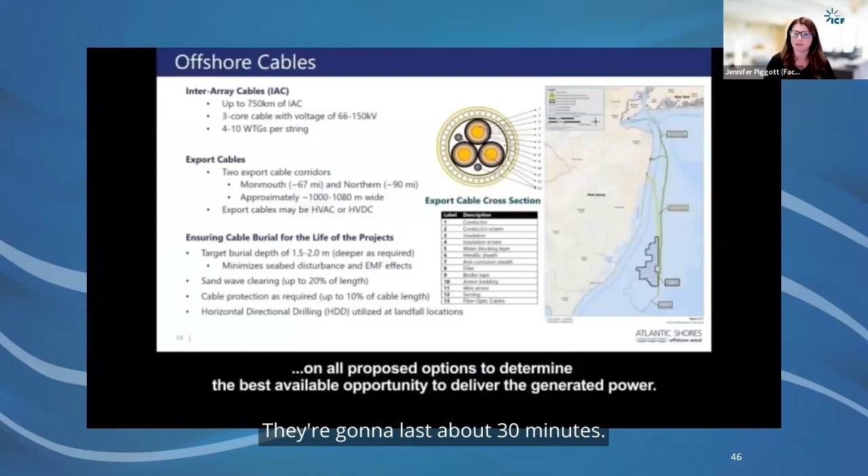Hello, everyone. My name is Stephanie Wilson, and I'm the Permitting and Environmental Manager for Atlantic Shores Offshore Wind. I want to start off by thanking BOEM for providing me this opportunity to introduce Atlantic Shores and the Atlantic Shores North project. I also want to thank those of you who are participating in this scoping meeting today. Your input into this process is vitally important, and we are glad to see you here.

The project proposed of this construction and operations plan is being developed by Atlantic Shores Offshore Wind, LLC, which is a 50-50 joint venture between EDF Renewables and Shell New Energies. This JV brings together two U.S. industry leaders in both renewable and offshore energy development, as well as two companies that have extensive experience in developing and delivering successful offshore wind projects across Europe.

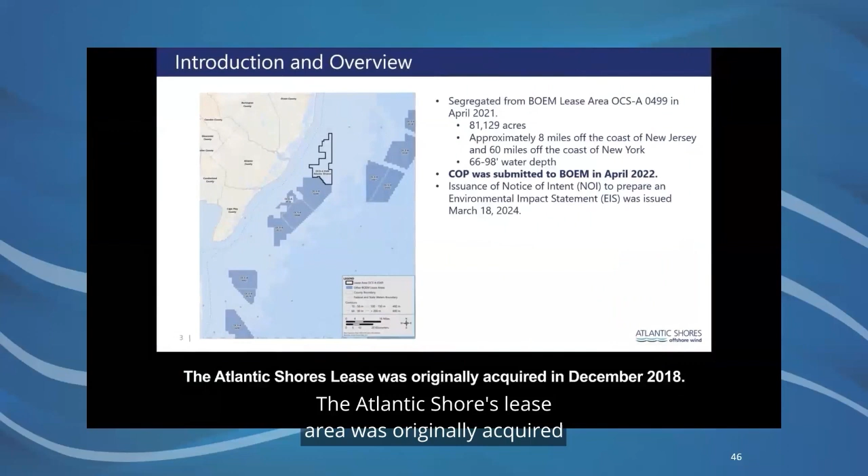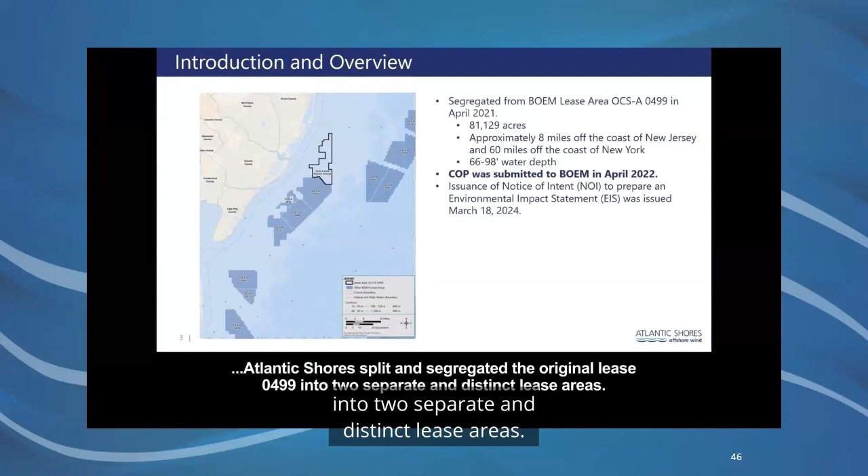The Atlantic Shores lease area was originally acquired in December 2018. In seeking to develop a portfolio of projects, Atlantic Shores split and segregated the original lease 0499 into two separate and distinct lease areas. The Atlantic Shores North lease area is now known as 0549. The development of lease area 0549 is the subject of the project I will be describing to you today. The projects within the Atlantic Shores South lease maintain the original lease number 0499 and are actively under review by BOEM and cooperating agencies in a separate proceeding.

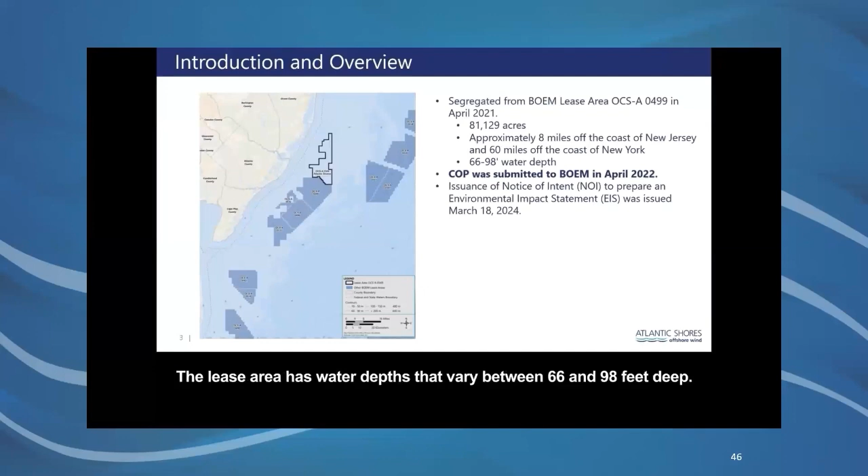The Atlantic Shores North lease is approximately 81,000 acres in size and located approximately 8 miles east of the New Jersey coast and approximately 60 miles south of New York. The lease area has water depths that vary between 66 and 98 feet deep.

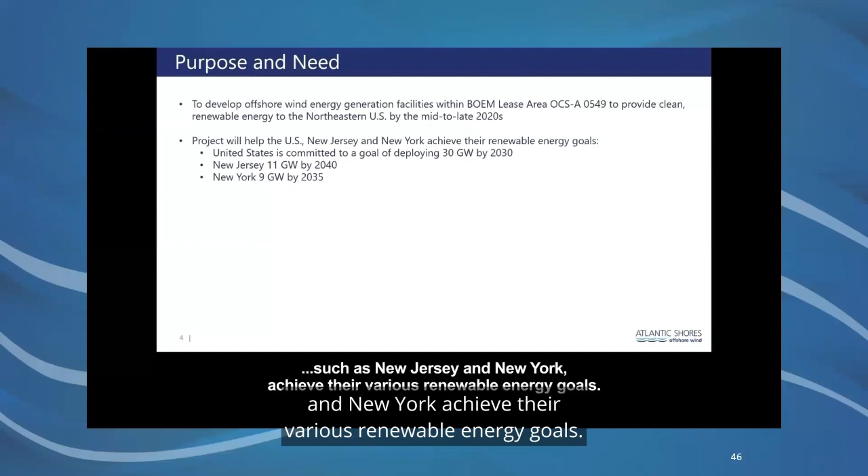The construction and operations plan for Atlantic Shores North proposes to develop an offshore wind energy generation facility to provide clean, renewable energy to the east coast of the United States by the mid to late 2020s. This project will help the United States and mid-Atlantic states such as New Jersey and New York achieve their various renewable energy goals. The United States is committed to a goal of deploying 30 gigawatts by 2030, while New Jersey is committed to 11 gigawatts by 2040, and New York is committed to 9 gigawatts by 2035.

The key benefits of the Atlantic Shores North project is that it will provide a diversification of the state's electricity supplies, an increase in electricity reliability, a reduction in greenhouse gas emissions, significant environmental and public health benefits, and substantial new employment opportunities and community benefits to host communities.

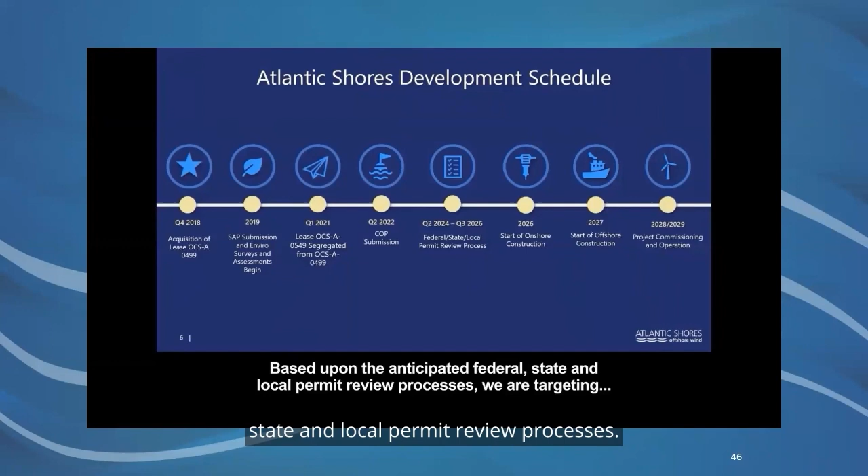As indicated in the slide, Atlantic Shores has been actively developing the lease area since late 2018. Based upon the anticipated federal, state, and local permit review processes, we are targeting start of onshore construction in 2026 and the start of offshore construction in 2027, followed by commissioning and operation of the project in 2029.

The construction and operations plan currently under review is the culmination of an extensive body of work, including over 5 years of stakeholder engagement, a thorough technical calibration of the proposed project design envelope with the market and key suppliers, and a robust environmental assessment that consists of over 35 surveys and studies and 5 seasons of geophysical and geotechnical survey work.

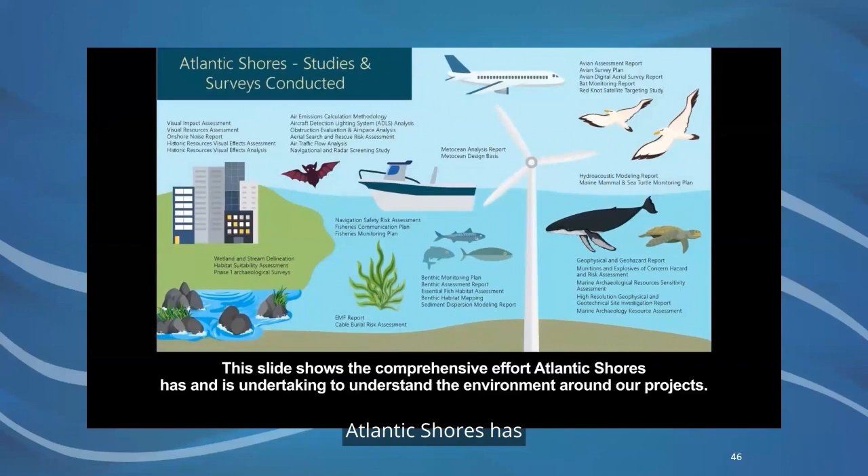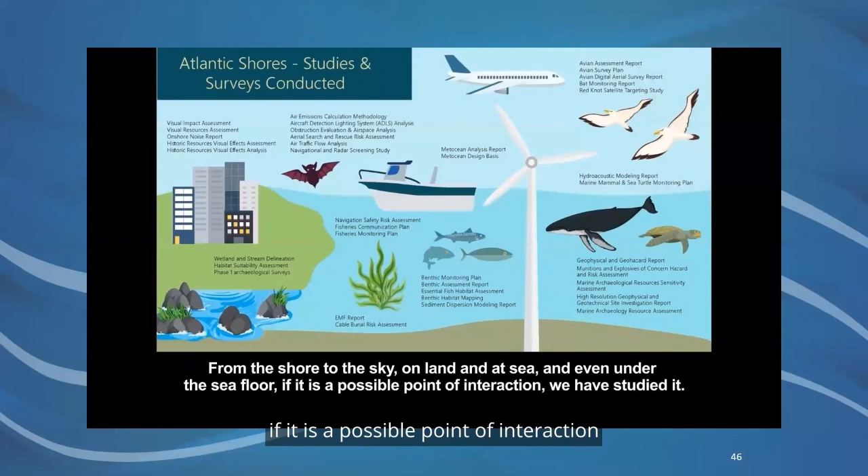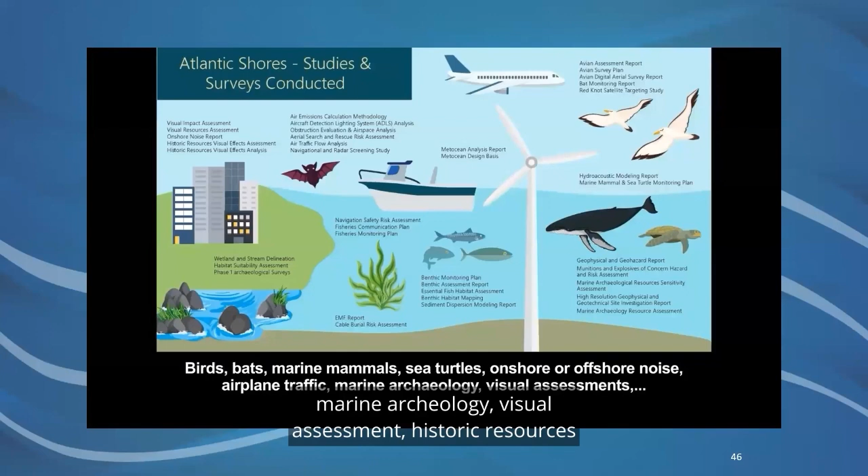This slide shows the comprehensive effort Atlantic Shores has and is undertaking to understand the environment around our projects, from the shore to the sky, on land and at sea, and even under the seafloor. If it is a possible point of interaction, we have studied it. Birds, bats, marine mammals, sea turtles, onshore and offshore noise, airplane traffic, marine archaeology, visual assessment, historic resources, and EMF are just a few of the areas we have studied.

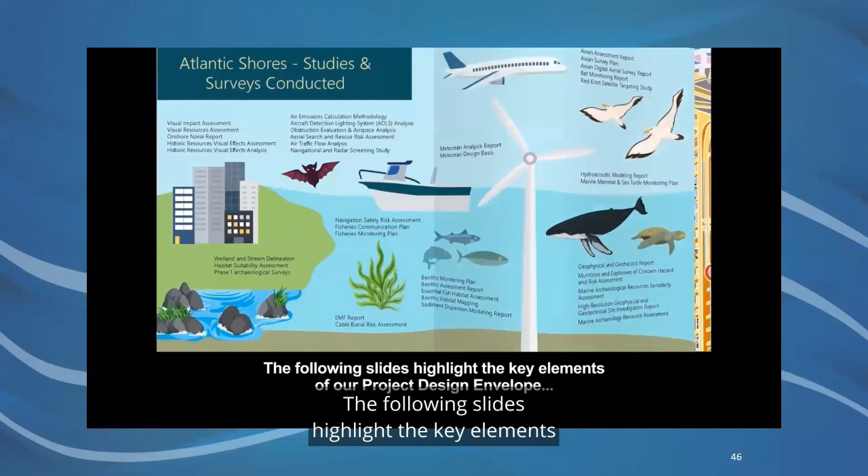The following slides highlight the key elements of our project design envelope that we have developed and included in our construction and operations plan. A project design envelope enables a range of project design components to be evaluated while the industry is evolving and growing. With each year, new technologies are made available to the market. The project design envelope enables Atlantic Shores to capture prior project developments and industry learnings by enabling a range of designs to advance through environmental review and permitting and support the advancement of best available technologies.

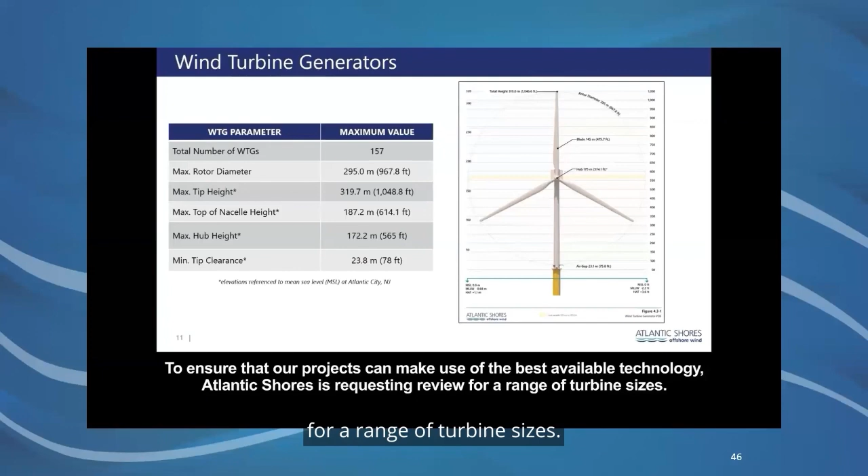We'll start offshore with our wind turbines. To ensure that our projects can make use of the best available technology, Atlantic Shores is requesting review for a range of turbine sizes. The maximum commercially viable wind turbine that has been evaluated in our COP has a tip height of approximately 1,048 feet.

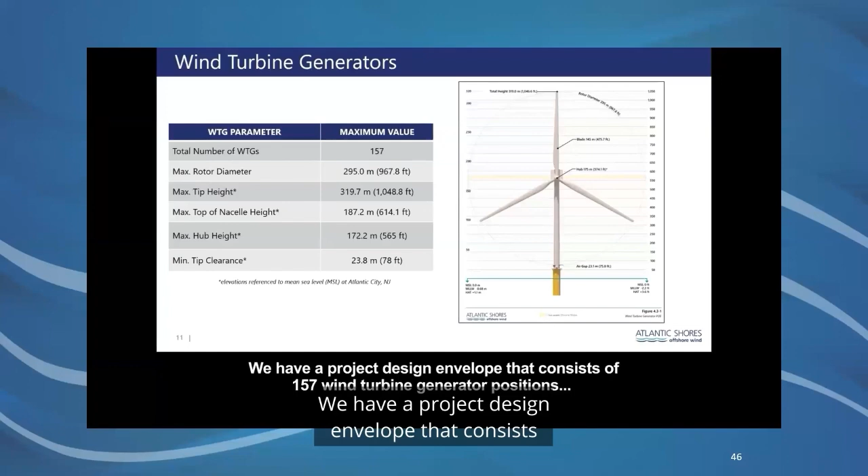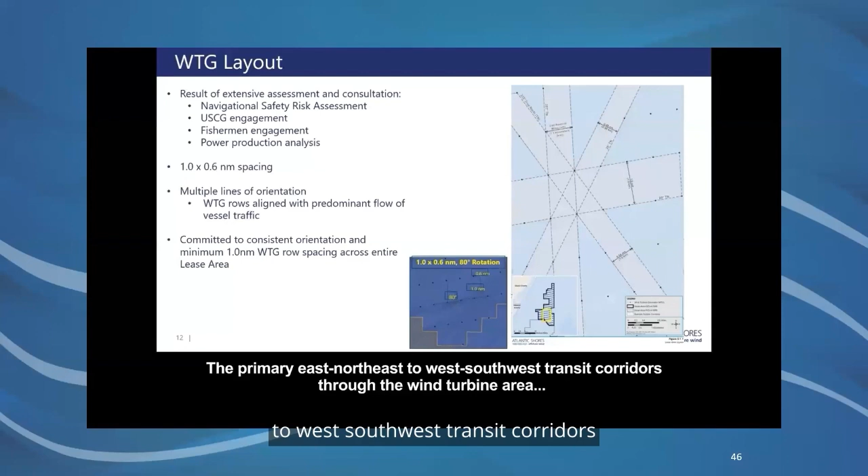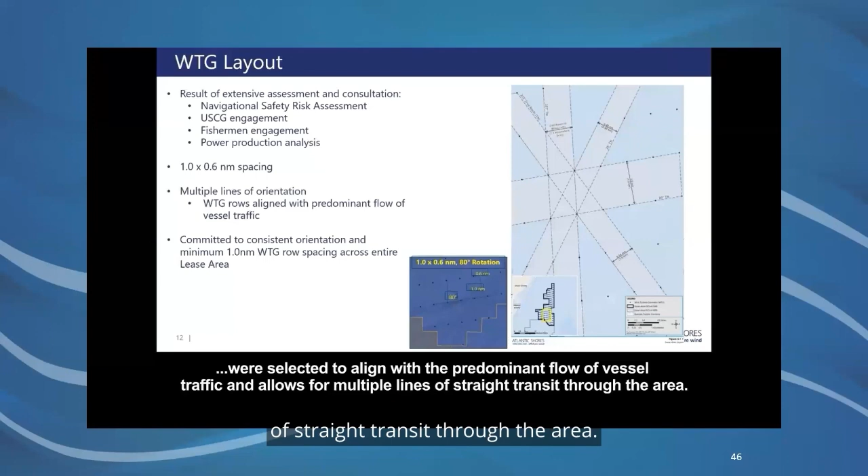We have a project design envelope that consists of 157 wind turbine generator positions, which have been laid out in a uniform grid pattern with turbine rows spaced 1 nautical mile apart within the lease area. The distance between the wind turbines along each of these rows is 0.6 nautical miles. The primary east-northeast to west-southwest transit corridors through the wind turbine area were selected to align with the predominant flow of vessel traffic and allows for multiple lines of straight transit through the area. This layout is consistent with the layout proposed in the Atlantic Shores South project.

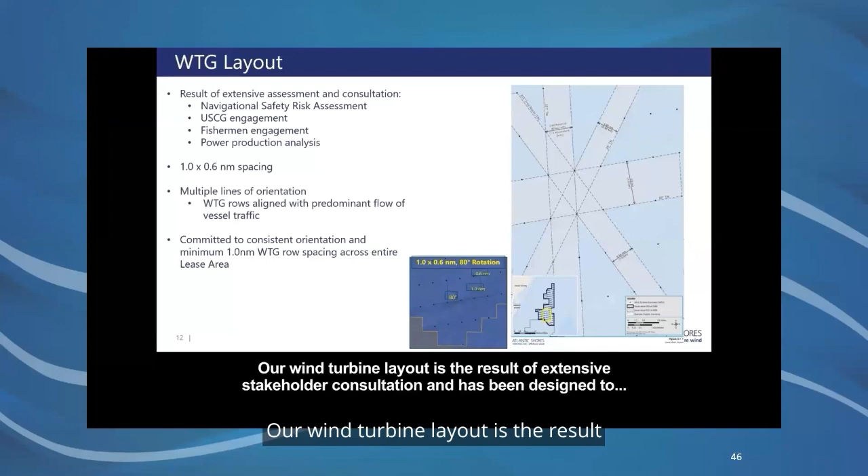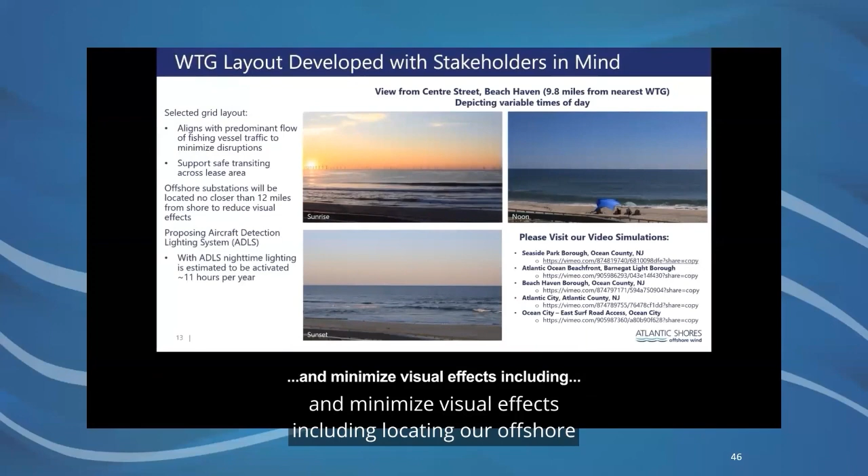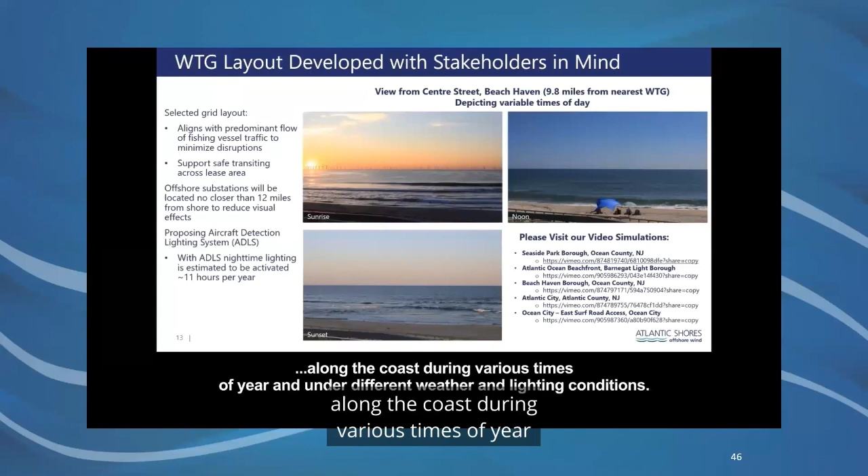Our wind turbine layout is the result of extensive stakeholder consultation and has been designed to support safety, maximize coexistence with existing marine users, and minimize visual effects, including locating our offshore substations no closer than 12 miles from shore, and proposing the use of Aircraft Detection Lighting System, or ADLS, which only activates when an aircraft is in close proximity. We encourage you to visit our visual simulation videos to get a better sense of what our projects might look like from various locations along the coast during various times of year and under different weather and lighting conditions.

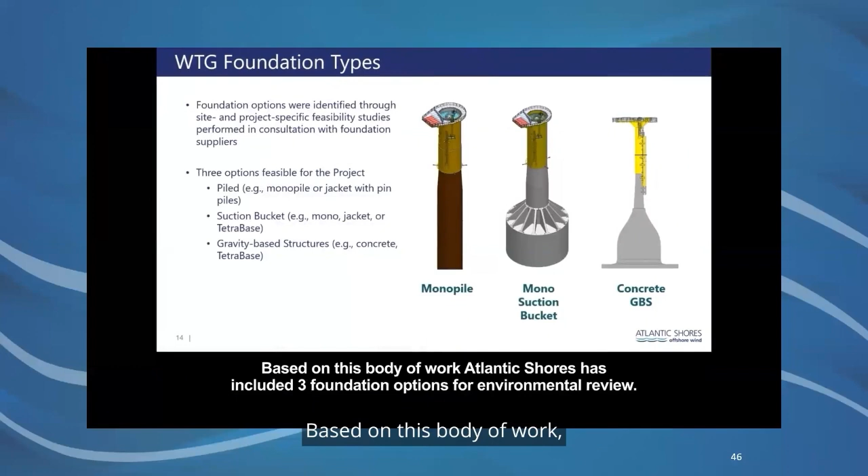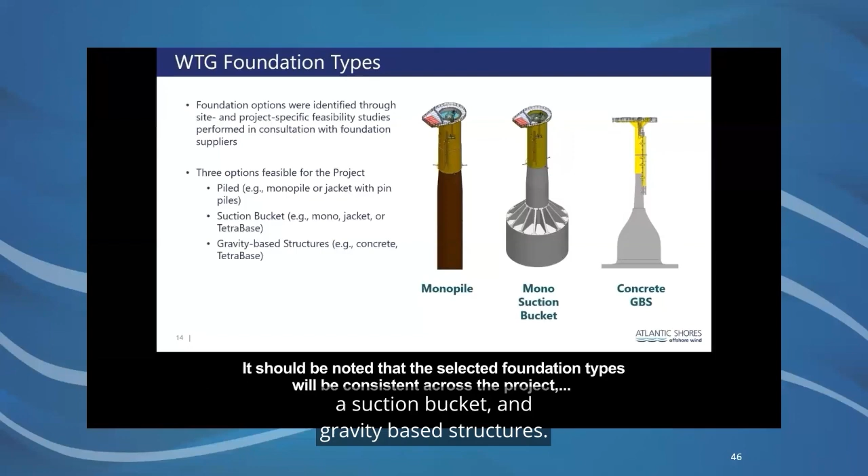Foundation options for our wind turbines were identified through extensive site and project-specific feasibility studies performed in consultation with foundation suppliers. Based on this body of work, Atlantic Shores has included 3 foundation options for environmental review: the piled foundation, a suction bucket, and gravity-based structures. It should be noted that the selected foundation types will be consistent across the project, meaning there will not be a mix and match of structures used for the project offshore wind turbines.

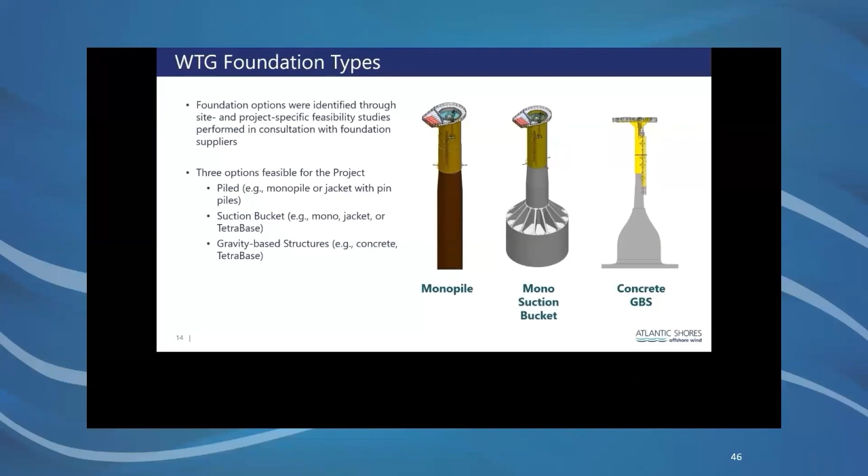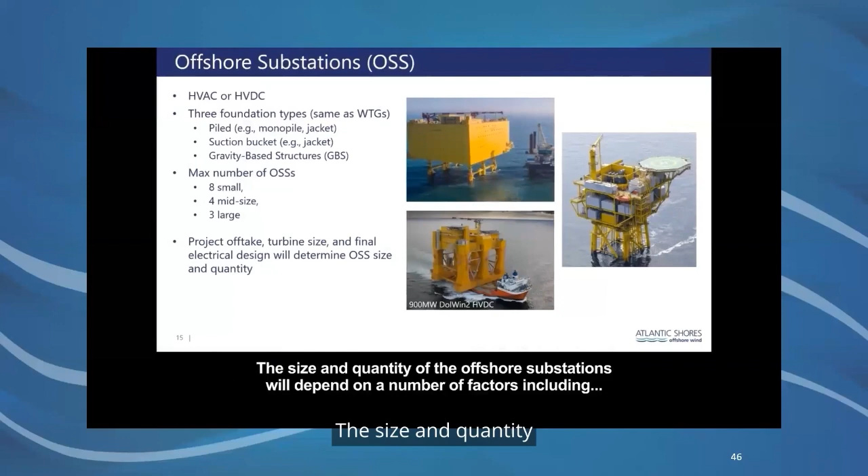We have evaluated both HVAC and HVDC technologies, as well as 3 offshore substation sizes. The size and quantity of the offshore substations will depend on a number of factors, including the project offtake, turbine size, and final electric design, but will not exceed the numbers proposed here.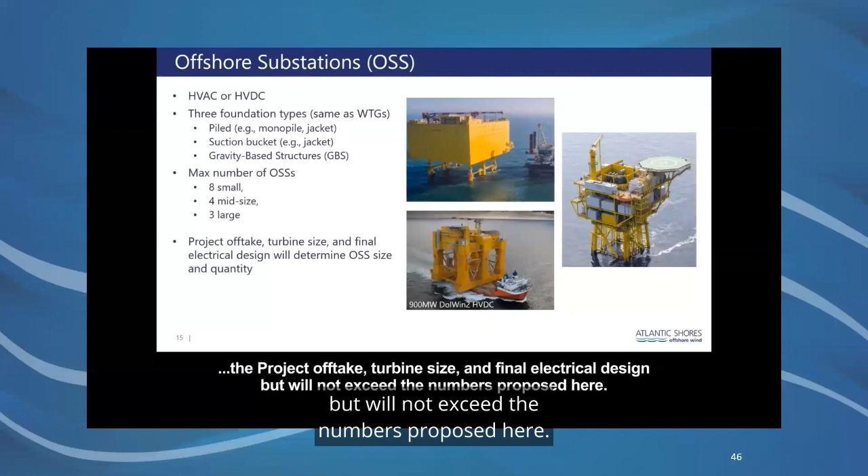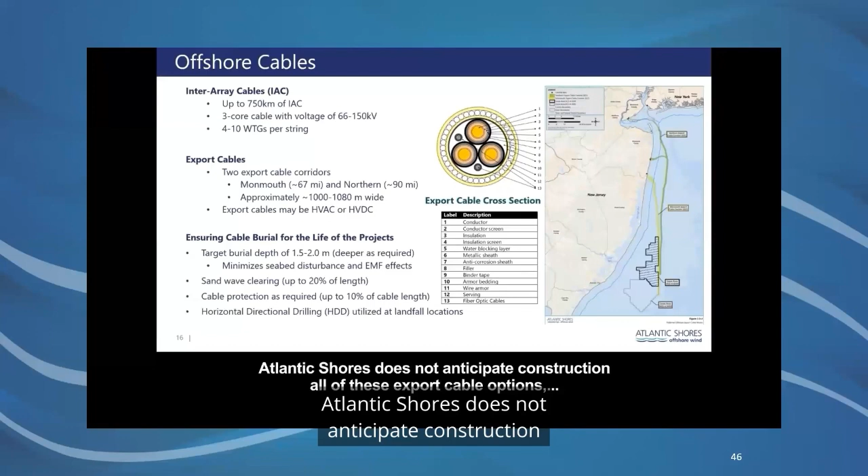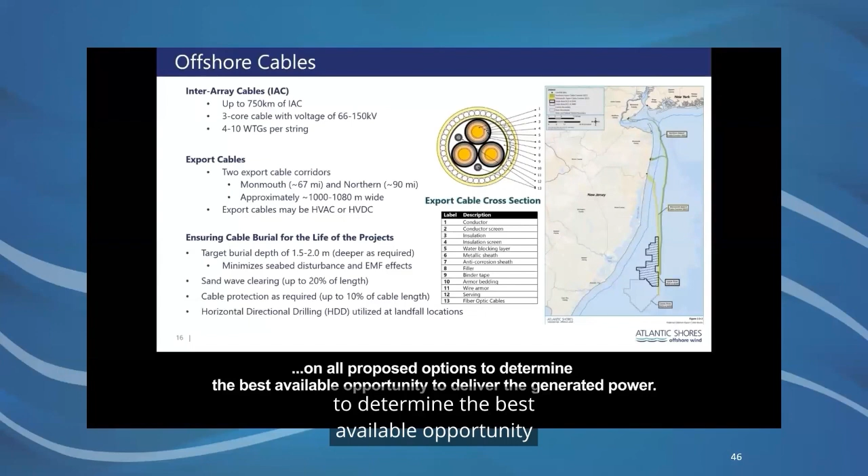The offshore cable system will consist of interarray cables that will carry the power generated by the wind turbines to the offshore substations, and export cables that will carry power from the offshore substations to shore. Export cables will be installed in corridors that extend from the wind turbine area to the potential landfall locations in New Jersey or New York. The export cable corridors depicted represent a range of delivery opportunities to New Jersey and/or New York. Atlantic Shores does not anticipate construction of all of these export cable options. However, we are seeking to complete environmental review and consultation on all proposed options to determine the best available opportunity to deliver the generated power.

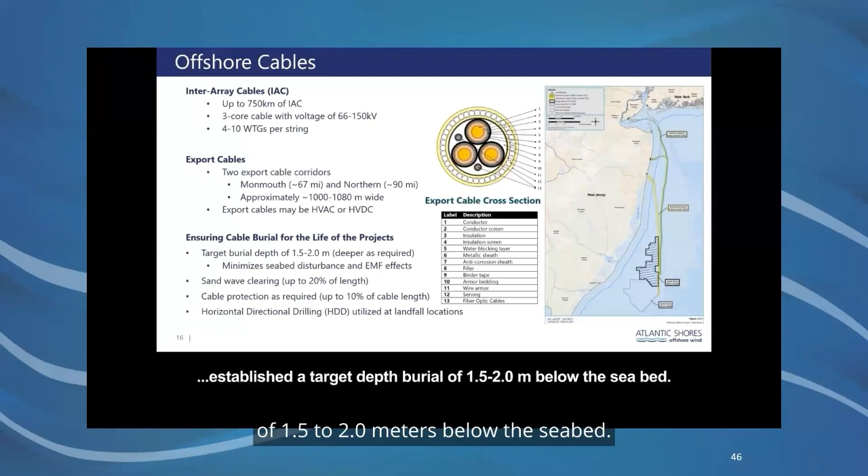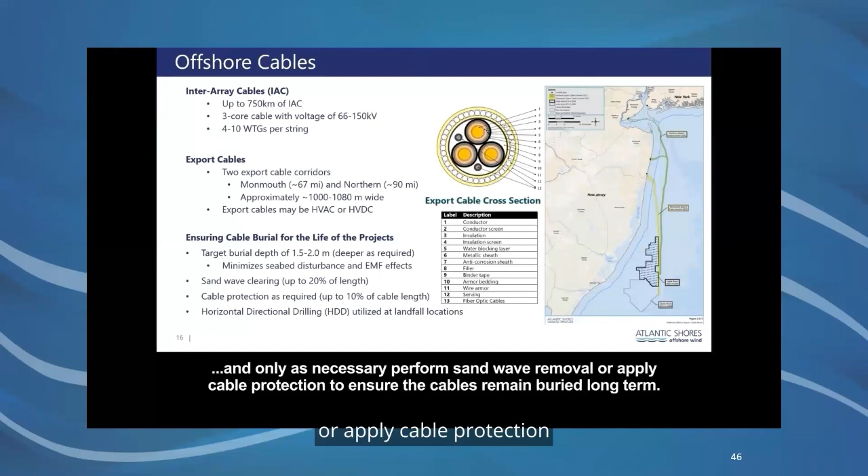To ensure the burial of the offshore cables, Atlantic Shores has established a target burial depth of 1.5 to 2.0 meters below the seabed. We've also committed to cable installation under shorelines via horizontal directional drill and, only as necessary, perform sand wave removal or apply cable protection to ensure the cables remain buried long-term.

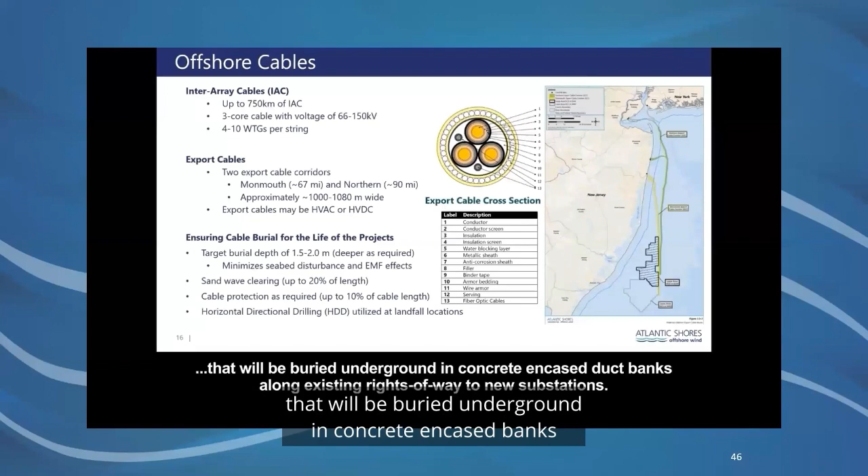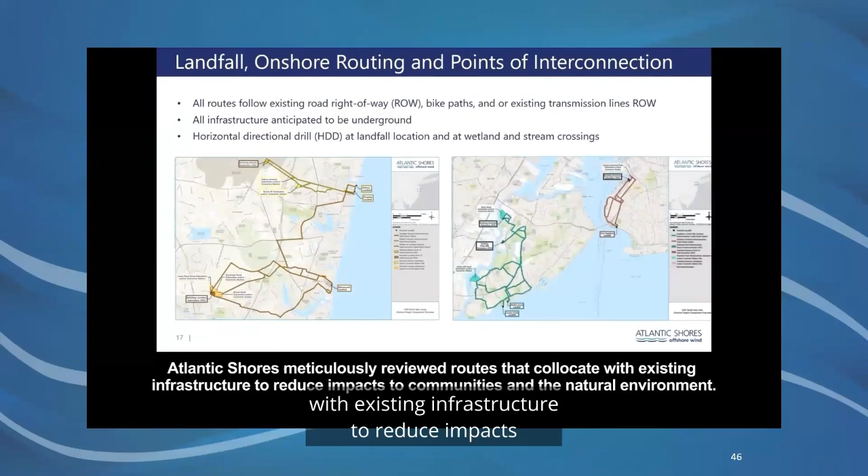Once the export cables reach the shore, they will be spliced into onshore transmission cables that will be buried underground in concrete encased duct banks along existing rights-of-way to new substations. Atlantic Shores meticulously reviewed routes that co-locate with existing infrastructure to reduce impacts to communities and the natural environment. The new substations, or converter stations proposed, will support the project's interconnections to the onshore grid.

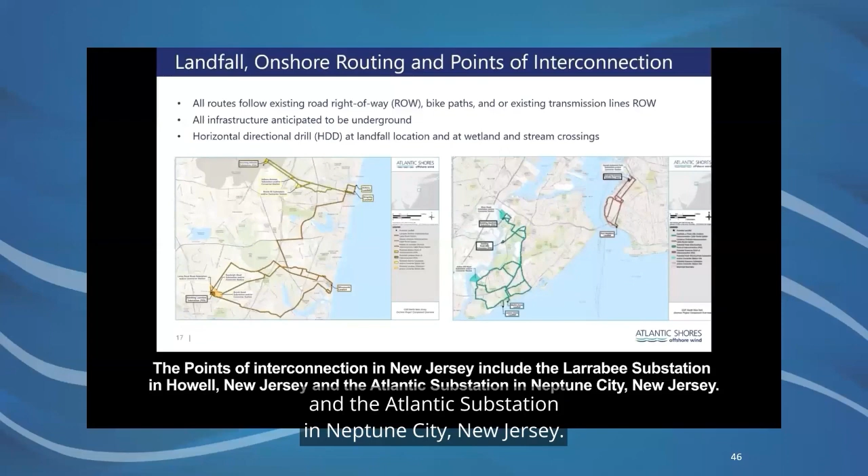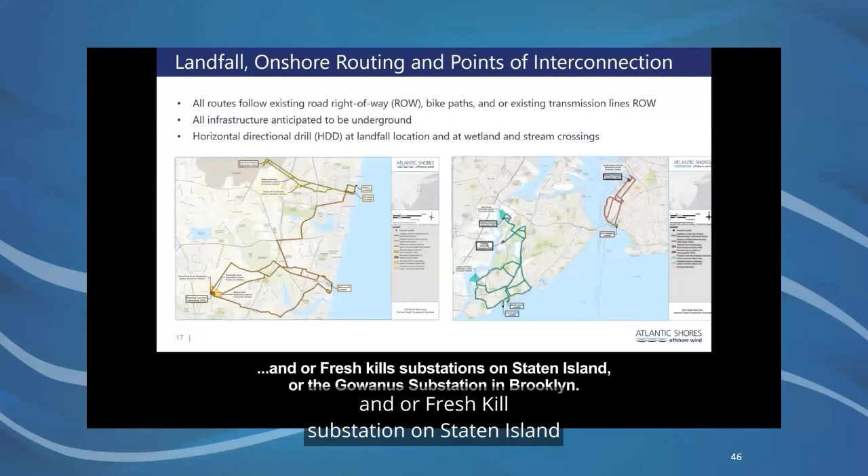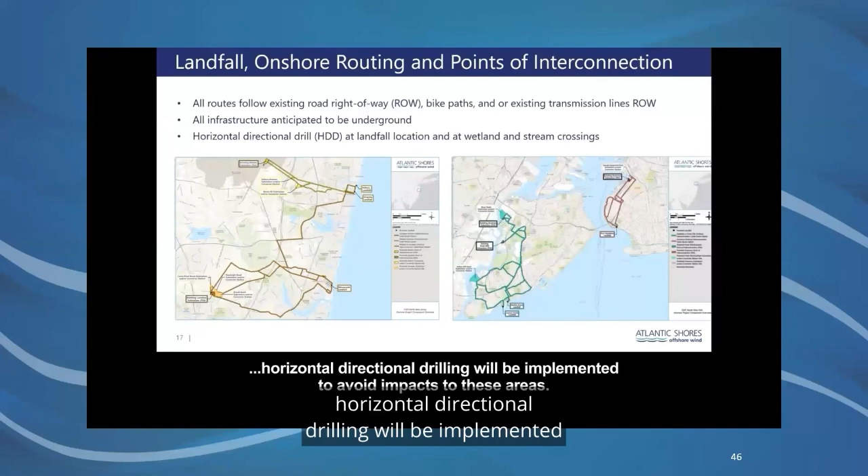The points of interconnection in New Jersey include the Larrabee substation in Howell, New Jersey, and the Atlantic substation in Neptune City, New Jersey. The points of interconnection in New York include the existing Goethals and/or Fresh Kills substation on Staten Island, or the Gowanus substation in Brooklyn. In places where our onshore transmission cables must cross sensitive habitats, such as wetlands or stream crossings, horizontal directional drilling will be implemented to avoid impacts to these areas.

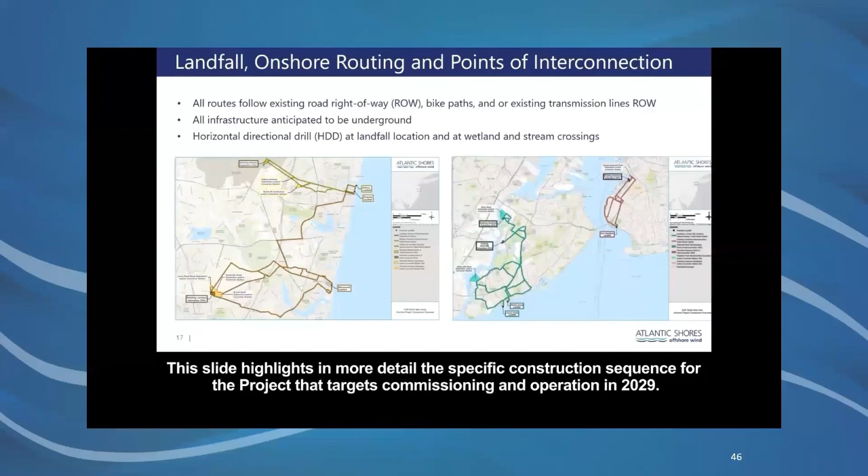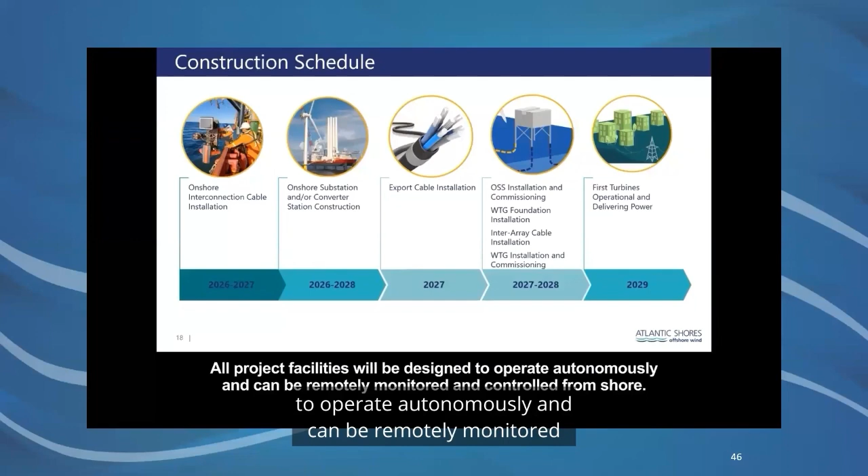This slide highlights in more detail the specific construction sequence for the project that targets commissioning and operation in 2029. Once commissioned, our projects will have the ability to operate for up to 30 years. All project facilities will be designed to operate autonomously and can be remotely monitored and controlled from shore. Day-to-day activities for the project will be managed out of a new dedicated O&M facility in Atlantic City, New Jersey.

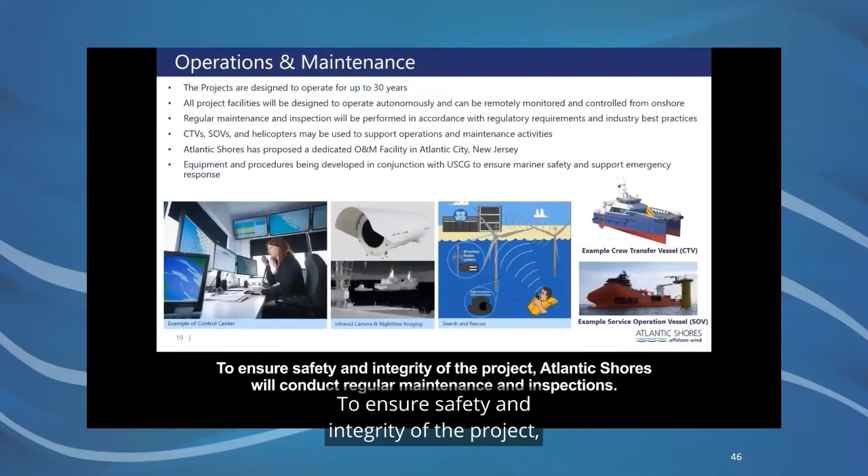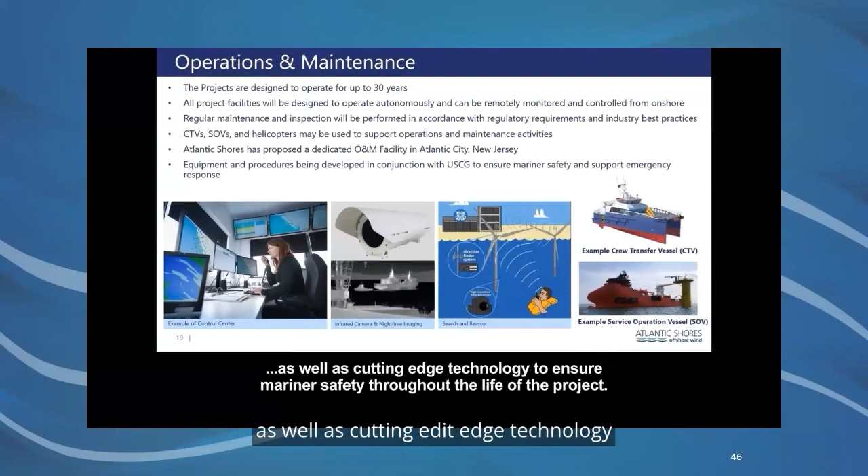To ensure safety and integrity of the project, Atlantic Shores will conduct regular maintenance and inspections, and we are proactively working with the U.S. Coast Guard to implement procedures as well as cutting-edge technology to ensure mariner safety throughout the life of the project.

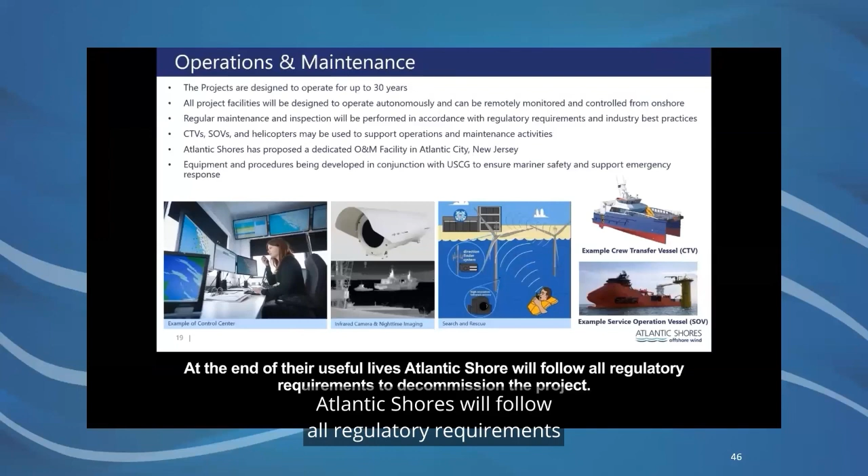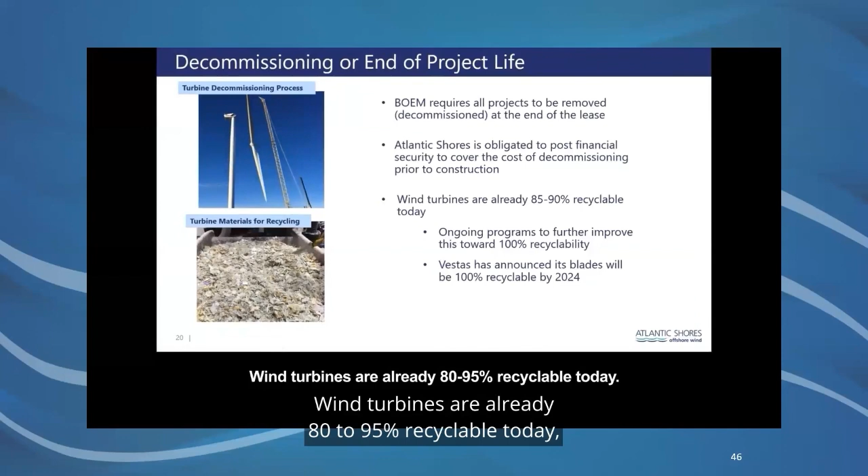At the end of their useful lives, Atlantic Shores will follow all regulatory requirements to decommission the project. Atlantic Shores is also committed to recycling as much of the project components as possible. Wind turbines are already 85 to 90% recyclable today, and there are ongoing programs to further improve this towards 100% recyclability.

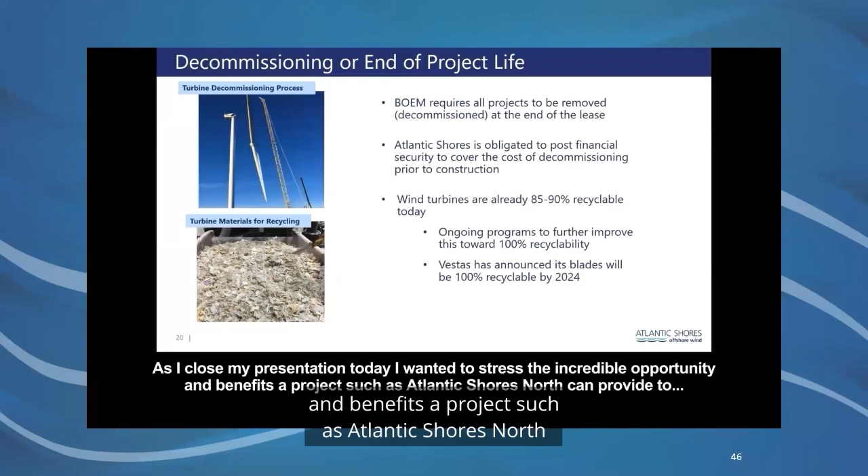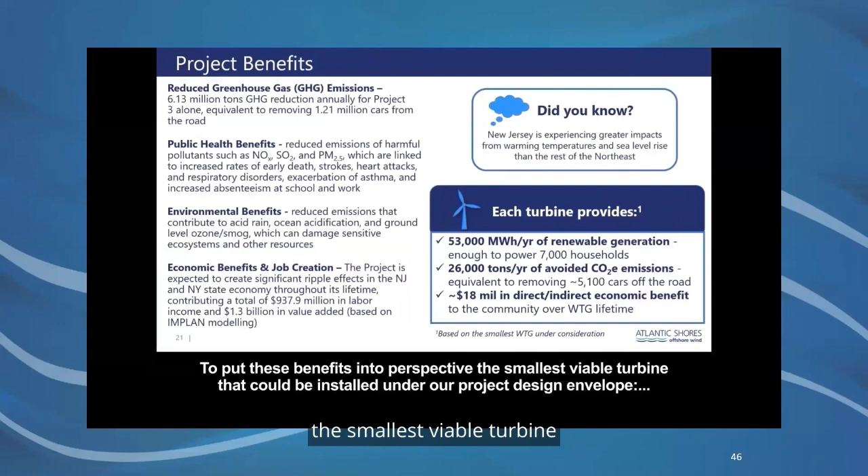As I close my presentation today, I wanted to stress the incredible opportunity and benefits a project such as Atlantic Shores North can provide to the environment, to human health, and to the economy through job creation. To put these benefits into perspective, the smallest viable turbine that could be installed under our project design envelope can each generate enough renewable energy to power more than 7,000 households and remove 26,000 tons per year of CO2 emissions, which is equivalent to removing about 5,100 cars off the road. And each can generate approximately $18 million in indirect economic benefit to local communities over the lifetime of the turbine.